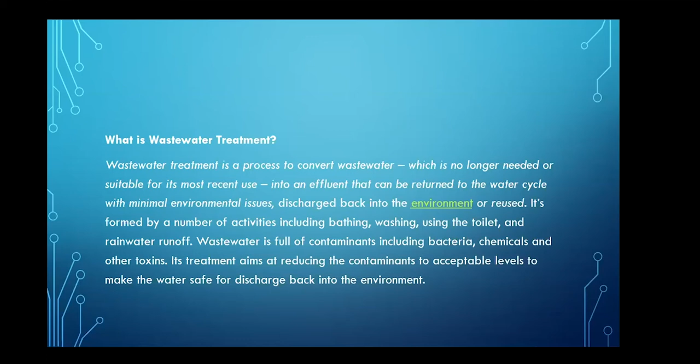I'm going to try to be quick because I was a little bit late. There are two wastewater treatment processes, namely physical treatment plant and biological wastewater treatment plant. Here in Rwanda, we have both. Physical treatment plant is usually held by public institutions led by the government of Rwanda, but many hotels and restaurants have biological wastewater treatment.

Biological wastewater treatment plants use biological matters and bacteria to break down wastewater matter. Physical waste treatment plants use chemical reactions as well as physical processes to treat wastewater.

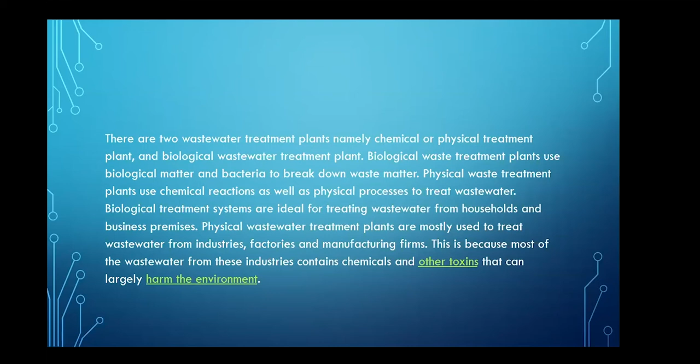And we have different types of wastewater. Wastewater includes mainly three types: stormwater runoff, industrial wastewater, and domestic wastewater. But in my presentation, I will mainly focus on domestic wastewater, which includes grey water and black water.

In grey water, we include wastewater from like bathroom, laundry, or kitchen. While black water is the combination of urine and feces.

In this diagram, they did not show all the components of black water. Black water consists of urine, feces, cleaning materials like toilet paper, and using water or fresh water.

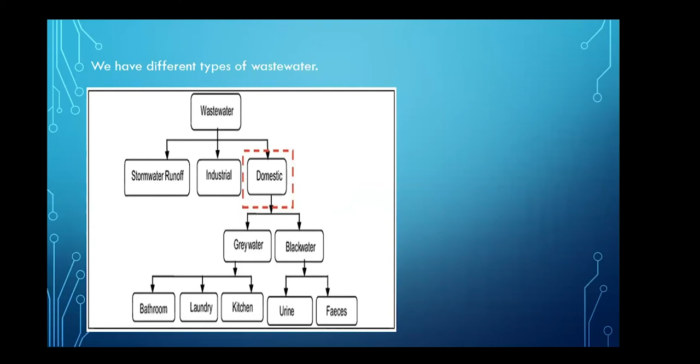As I said, in this presentation I will deal with black water and grey water treatment in Rwanda. Black water is the combination originating from toilet fixtures like feces, urine, flush water, and cleansing materials such as toilet paper.

These are engineering terms like grey water and black water. Grey water is the wastewater that originates from bathroom, laundry machines, and so on. We also have others like brown water, which is only the combination of water and feces.

Next, we are going to see the general steps of wastewater treatment processes carried out in Rwanda. These steps I'm going to outline are the most common treatment processes carried out here. I visited many treatment plants here in Rwanda, like the treatment plant in CHUK.

CHUK is the University Hospital of Kigali. It's the preferred hospital in Rwanda.

I also visited other different treatment processes to see how they occur in different hotels here in Rwanda. Many of them use these points I'm going to outline. So the general steps of wastewater treatment processes carried out here in Rwanda are as follows.

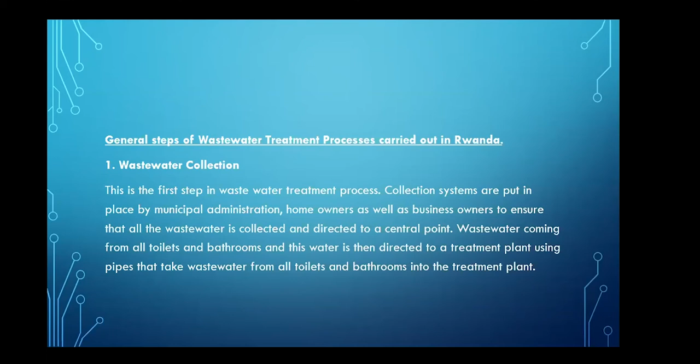The second point is odor control. At the treatment plant, odor control is very important. Wastewater contains a lot of dirty substances, as you know from its term wastewater, that cause a foul smell over time. To ensure that the surrounding areas are free of the foul smell, odor treatment processes are initiated at the treatment plants. The main purpose of odor control is to reduce the bad smell from wastewater.

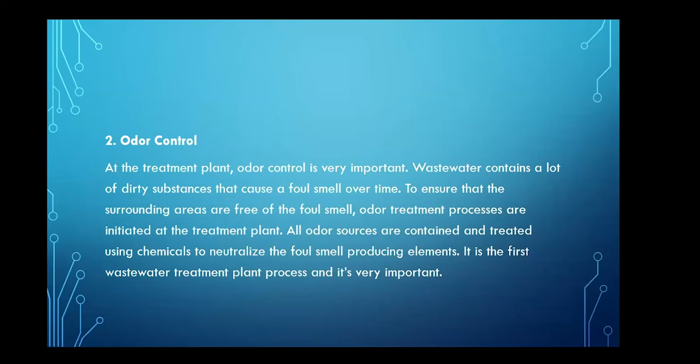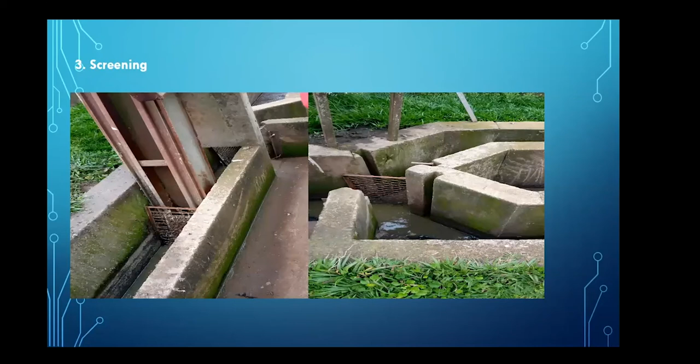This is the next step: screening, which is the next step in the wastewater treatment process. Screening involves the removal of large objects, for example cotton buds, plastics, rags, gloves, pads, and sanitary items. Failure to observe this step results in constant machine and equipment problems. Specially designed equipment is used to get rid of grit that is usually washed down into the sewer lines by rainwater. The solid waste removed after screening is collected and transported by the protected worker and disposed of in landfill.

Also, in Rwanda, most landfills are not engineered except for one which is designed by proper engineering measures. In Rwanda, we have almost no true landfills, mostly dump sites.

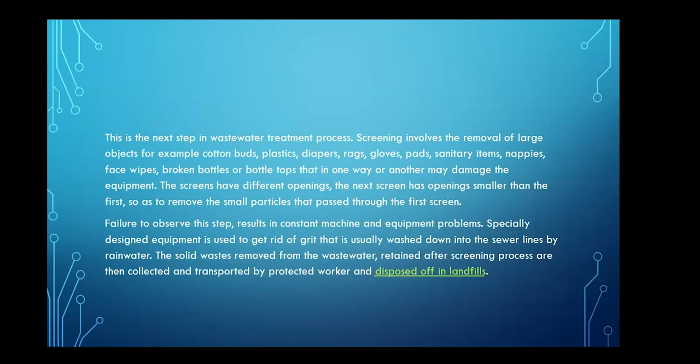Then the fourth step is the primary treatment. Sorry, my internet was a bit unstable, but right now I think you can hear me. Primary treatment.

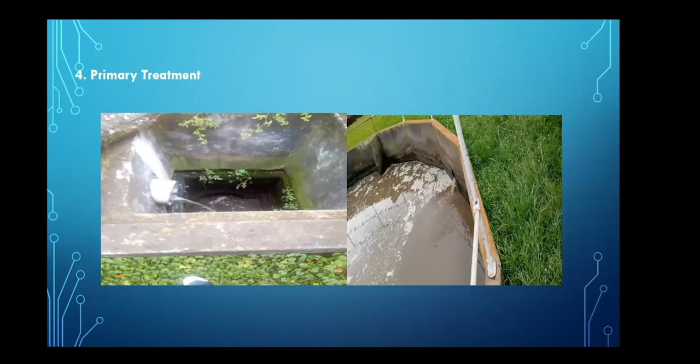This is the pipe which collects all wastewater from the toilets inside the CHUK hospital, and it transports it to this tank. This process involves the separation of macrobiotic solid matter from the wastewater.

Primary treatment is done by pouring the wastewater into big tanks. Air is first pumped into huge aeration tanks, which mix the wastewater with the seed sludge, a small amount of sludge, and the growth of other small microorganisms that consume the remaining organic matter. The remaining water is then pumped to the secondary treatment.

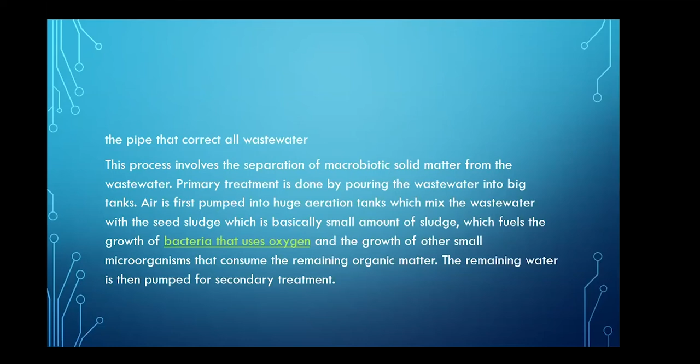So we see the secondary treatment here. Yeah, you can see this is the first treatment, and as you can see, the red thing is the aeration chamber. Wastewater from all toilets in general are transported through pipes.

These photos I took from CHUK hospital, but I can say these steps are followed by many treatment plants here in Rwanda, though sewage systems in Rwanda are not many, especially in Kigali City, they cannot really see the like.

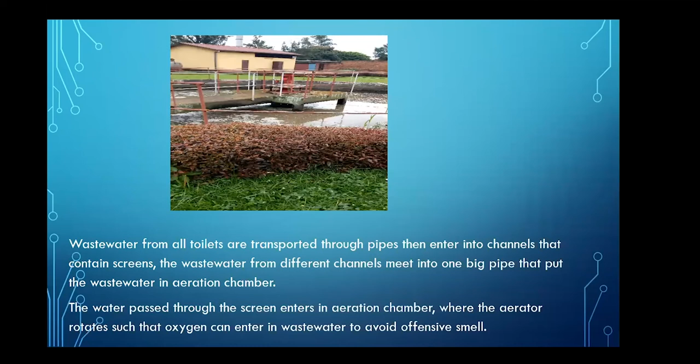So the wastewater from all toilets is transported through pipes, then enters into channels that contain screens. This is the aeration chamber. This is how it looks when the aerator is rotating.

It rotates 30 minutes and stops another 30 minutes, but sometimes it rotates more, depending on how they set it. It works regularly; you can set it to rotate 1 hour and stop another hour, depending on how you want. This avoids bad smell as well.

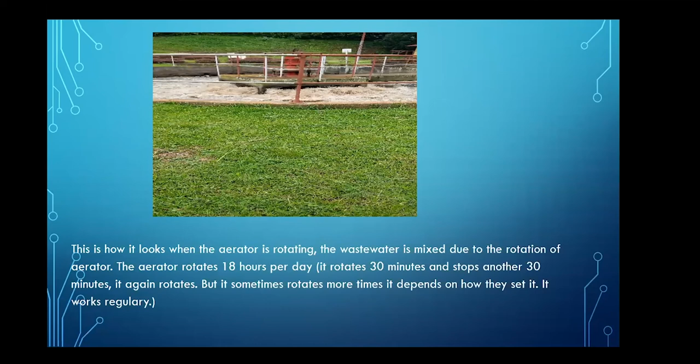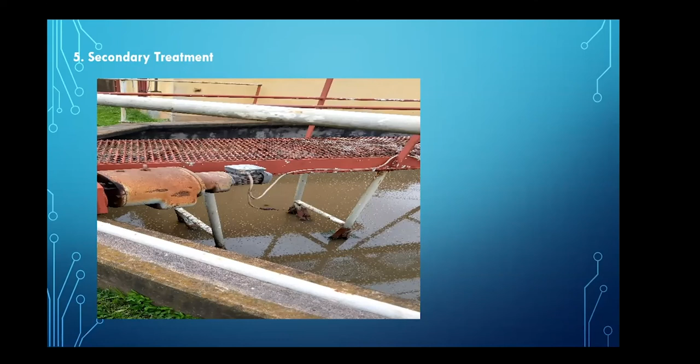This is the secondary treatment, which is below the first treatment. The secondary treatment is also known as the activated sludge process. This stage involves adding seed sludge to the wastewater to ensure it is broken down further so the solid matter settles at the bottom of the tank.

They add coagulants. The sludge, or solid waste, that settles at the bottom of the tank is removed by large scrapers and pushed to the center of the cylindrical tanks, then later pumped out for further treatment. This process leads to the production of large particles that settle down at the bottom of the huge tanks.

The wastewater passes through the large tanks for a period of 3 to 6 hours. This is how it looks: the sediments stay down in the region in front of the teeth. These are the small teeth, so the cone-shaped tank is surrounded by small teeth, and the wastewater that does not contain any particles passes through the teeth and goes behind, exiting through the pipe.

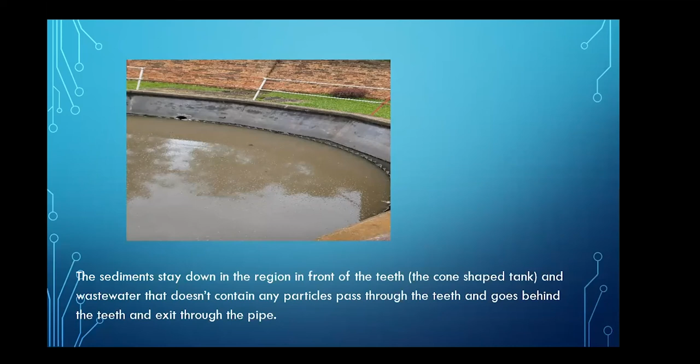The sixth step is disinfection, which is the addition of chemicals to kill the bacteria. After the primary and secondary treatment stages, there are still some disease-causing organisms in the remaining treated wastewater. That's the reason the sixth step is to kill the remaining bacteria or pathogens in the water before it is released into the environment.

This is the path the wastewater that leaves the sedimentation chamber passes through this channel. This is a channel through which they put tablets of chlorine that kill some pathogens.

This channel: the water that passes through the small teeth goes through this channel to the Nyabugogo River, but they make sure before letting this water into the Nyabugogo River that it causes no harm to the environment, because water from the Nyabugogo River is used by many Rwandans in their agriculture, including activities like irrigation, among others.

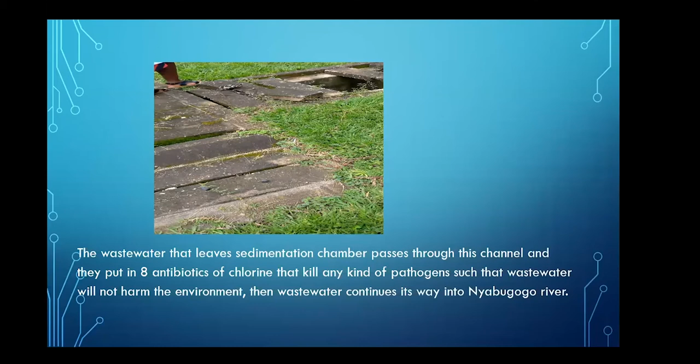The final step is sludge treatment. The sludge comes from the treated wastewater and is produced and collected during the primary and secondary treatment processes. It requires concentration and thickening to enable further processing.

We collect this sludge from the treatment plant and treat it. There is post-treatment of this sludge before it is used as a soil conditioner, so that it can increase the yield of farmers.

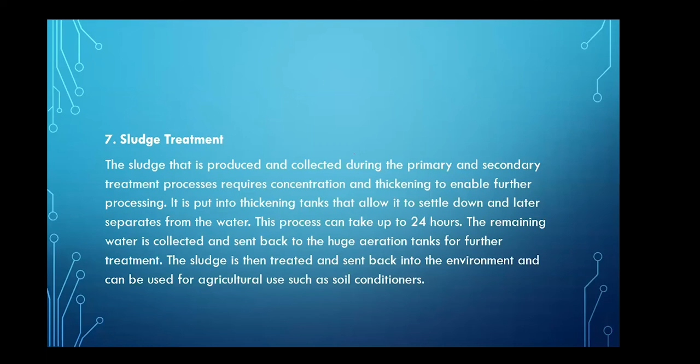This is the tank where sludge is stored. It looks green, but this is the sludge, as it is where they apply thickening to separate the sludge and the water. You can see it is exposed outside, so it even evaporates due to the heat from the sunshine.

Then the sanitation vehicle that transports waste usually comes every month and takes away the sludge from the septic tank, and this sludge is used for agricultural purposes such as soil conditioners, as I said.

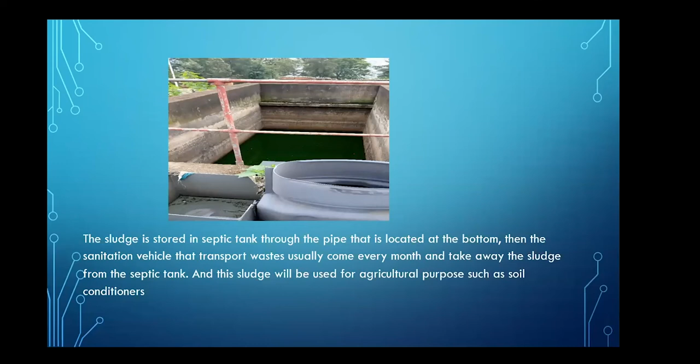Wastewater treatment has a number of benefits. For example, treatment ensures that the environment is kept clean, which is the first step. In short, wastewater treatment has a number of benefits, but a few of them are: the first is protection of human health, and the next is to ensure the environment is kept clean, or protection of environmental health. That's the main benefit from wastewater treatment.

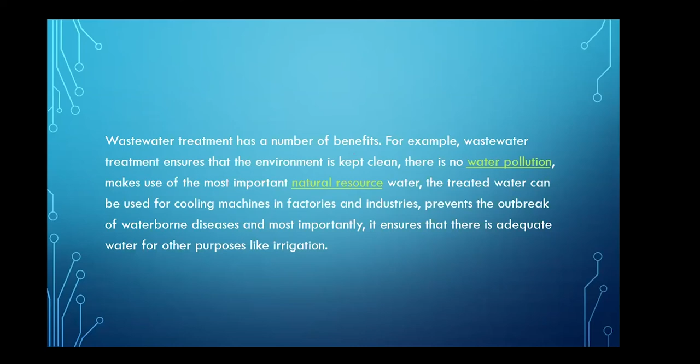The next part of my presentation is sanitation in Rwanda, which I enjoy most because it involves design, and I like the design of sanitation systems and technologies.

Let's think of sanitation as the prevention of human contact with waste, or as the provision of facilities and services for the safe disposal of human feces and urine. Here in Rwanda, UNICEF provided some facilities for the safe disposal of human feces and urine to some citizens of Rwanda in different districts.

Basic sanitation means that every household has its own toilet and does not share it with another household. This toilet should also keep human waste out of contact with people. Here in Rwanda, only 64% of the population have access to these sanitation services, so we can say that only 64% of Rwandans access appropriate sanitation in Rwanda.

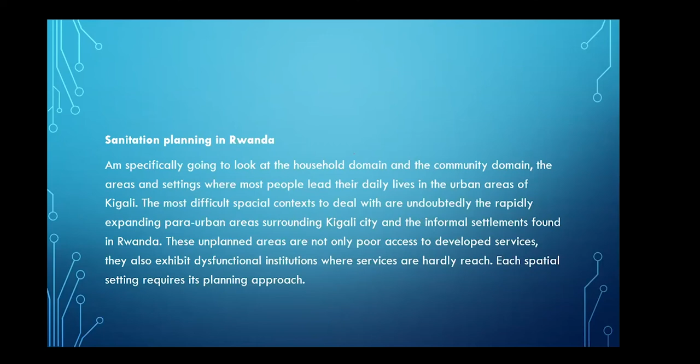The first focus of the Rwanda government is to end open defecation in the whole country, even in rural areas, and also to ignite a change in sanitation behavior rather than just constructing a lot of toilets. So the first step is to put an end to open defecation.

It starts by enabling people to do their own sanitation process through appraisal, observation, and analysis of their practices of open defecation and the effects these have on their lives. The main target of the government of Rwanda, and all Rwandans, is to end open defecation. Here in Rwanda, toilet access is often not the main issue; rather, it's safe handling of human waste.

Rwanda's goal of ending open defecation is achieved by encouraging, through analysis of the practices of open defecation, teaching people how bad it is, so that all citizens of Rwanda can know the bad impacts of open defecation, which can contaminate water bodies or cause other diseases like cholera, among others.

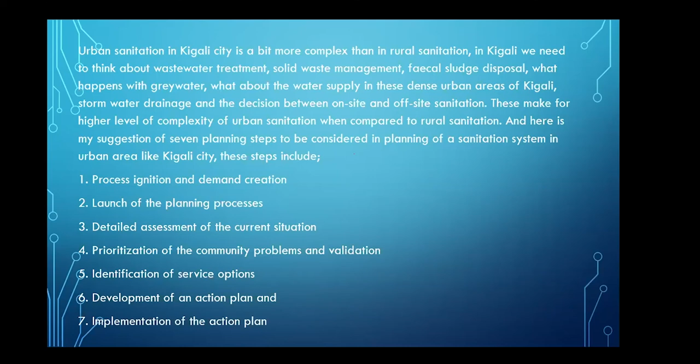The volume of each product will greatly influence how it is transported and treated within the sanitation system. The range and types of products will determine the number and sequence of technologies needed in the final design. Some, like humus or compost, need post-treatment so the sanitation products can vary in large numbers.

In Rwanda, we have many sanitation products, and some are very important to people, who use them to produce goods and services, like biogas. Biogas can be used in cooking, and it can be important to the community.

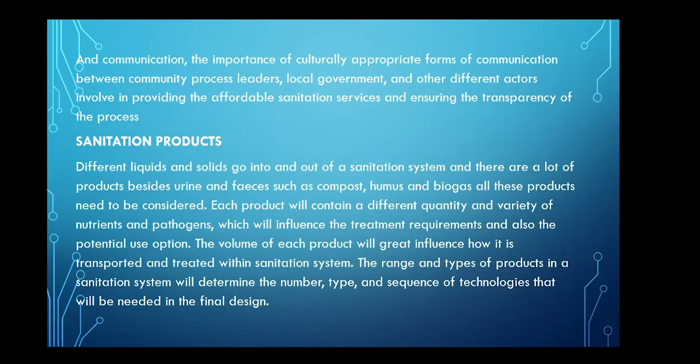In Rwanda, we have sanitation functions, five function groups. The first is user interface, which involves facilities like dry toilets, pour flush toilets, and cistern flush toilets. The second functional group is collection and storage, for example single pit or septic tank, etc.

We have conveyance or transport, which includes trucks categorized as motorized emptying and transport, and simplified sewers, as I presented earlier for CHUK wastewater treatment plants. We also have semi-centralized or centralized treatment, for example waste stabilization ponds, aerated ponds, and lagoons.

In the final functional group, we have reuse and final disposal, for example irrigation or soak pits to allow infiltration as well.

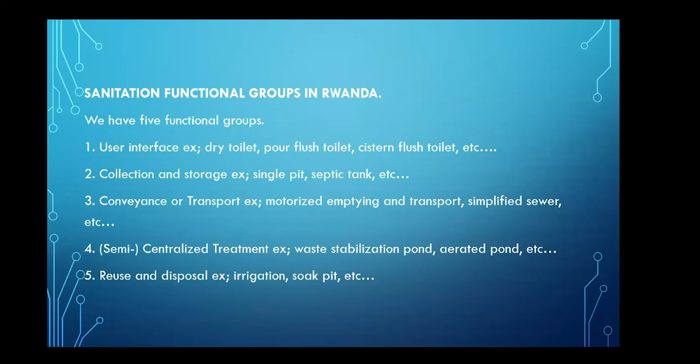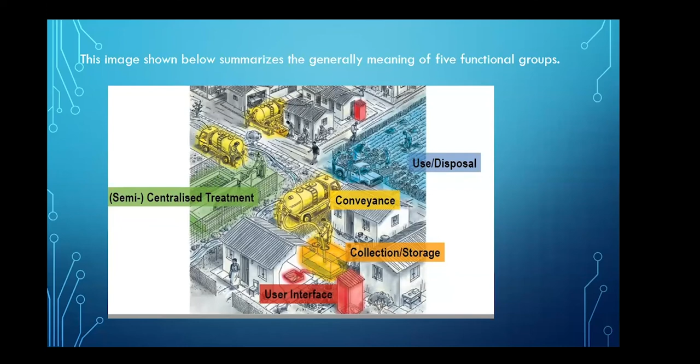This is usually good for soil conditioners or urine for fertilizers. In Rwanda, we built our sanitation system using technology from five different functional groups, and each group has different technologies from each other. But it is not necessary that every system requires a technology from each functional group, like user interface, if there is no technology available for that group.

The dense urban areas in Kigali are complex, so there is no strict formula for designing them, but we can use function groups to organize and plan an appropriate system based on the products and technology available in Rwanda.

In conclusion, wastewater treatment is one of the most important environmental conservation processes that should be encouraged worldwide, because when we treat wastewater we get more benefits from it, like the protection of human health, the protection of the environment, and among others.

The sanitation system template is like a matrix of products and functional groups. Technology is selected by following a flow path that guides each product through the necessary functional groups.

Here in Rwanda, in order to achieve effective sanitation, we must carry out research into appropriate technologies aiming at a large-scale transition from traditional to hygienic latrines at low cost to households, and also develop private sector involvement in on-site sanitation like latrines, septic tanks, septic trucks, and safe dumping.

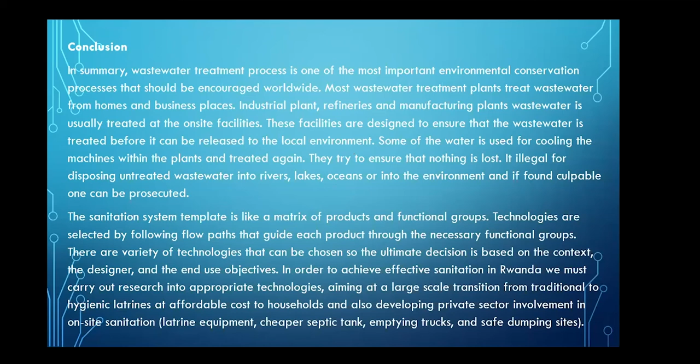Someone asked, how has COVID affected your movement as far as water treatment and sanitation goes? Has it had an adverse effect on the things you're trying to get accomplished?

Thank you for your questions, Mr. Jones. COVID affected many things here in Rwanda, not only sanitation and wastewater treatment, but also transport and the economy of the country.

We had one project which was wastewater treatment in Musanze district. We started last year in November, and implementation of the project was in February and March this year. But due to COVID, the government closed all things related to engineering, like construction of any engineering project, and all activities that include meetings or collaboration of many people face to face were not allowed here in Rwanda. Due to that, we were not able to do that project on time, and we are still planning it right now.

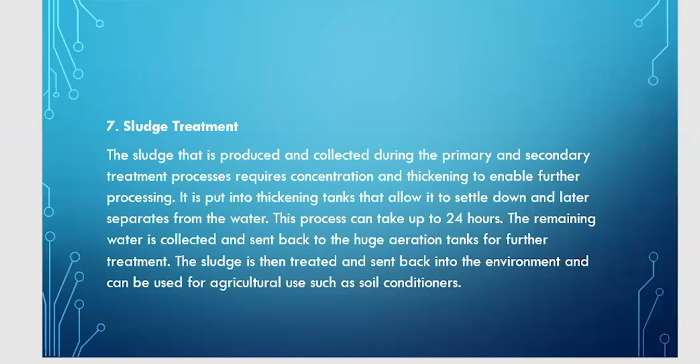I'm guessing—did we lose internet with him? Yeah, I think so. Can you hear me now? Okay, there we go. Okay Jones, I was saying, sorry, the internet was interrupted.

I was saying, before the government or public institution here in Rwanda plans for a sanitation facility, let's say public toilets or anything else that will affect the large community of people, the government will first plan it and show it to the community leaders.

They take a survey, hear the ideas of the community, and allow the community to take part in the implementation. The first people they give jobs to in the implementation are the community members in that area. After implementation, the whole project is left in the hands of the community leaders, so it will be controlled by them and beneficial to the whole community. But the main and important steps to operate the treatment plants or sanitation facilities will be done by the communities, especially on behalf of their own benefits.